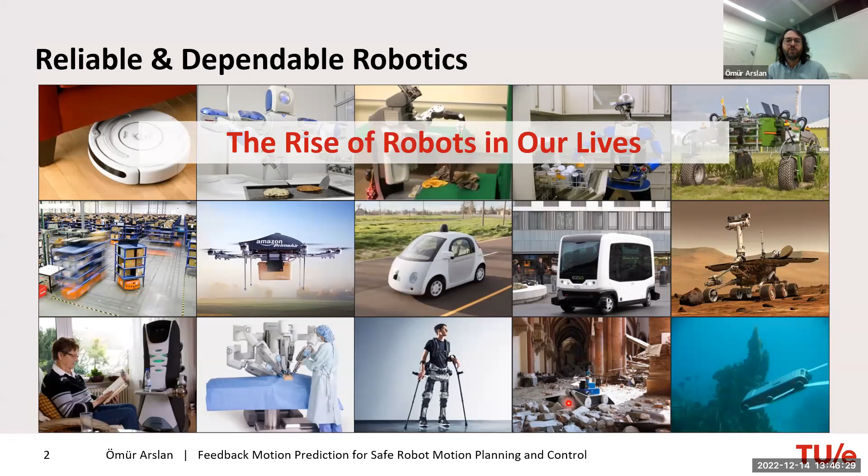Yes. So why robotics? I believe that everyone is aware of this popular news about robotics, how they are going to change our lives from mobility, with self-driving cars, to autonomous deliveries, maybe in the warehouse. Also, of course, the most important thing is they will play a key role for people in the long run, for elderly care, minimizing some kind of dangerous tasks for people. And all of this is, of course, because of one thing: these platforms provide autonomous motion. So these platforms ideally need to understand what they are seeing, and they can come up with some plan and execute it and perform a diverse set of tasks.

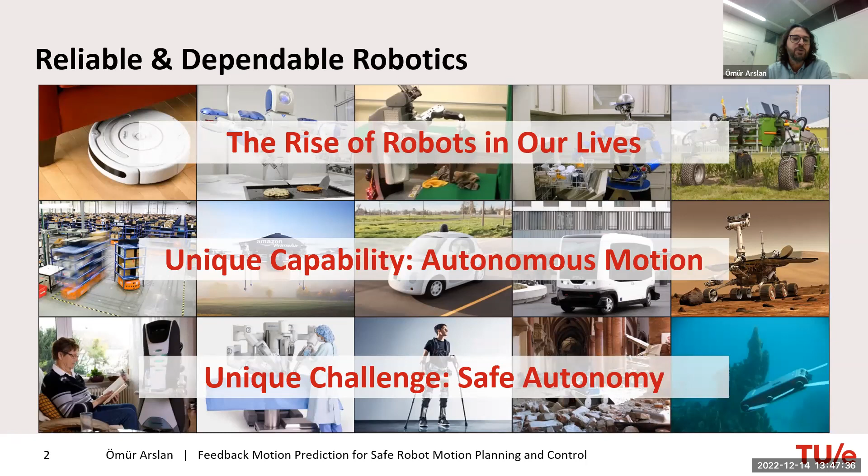And that is the main research focus I have currently. I work on the algorithmic side. I am not interested in designing new hardware because there are many people doing this kind of work, and it's a relatively very established field of research, also technology domain. But when we look from the algorithmic perspective, how to make these machines smart, it is still a challenge.

I usually look at fundamental and applied research for safe robot autonomy and active perception, which means making a link between the decisions you make for your control and also for perception. There's a nice interplay when we think about mobile robotics between perception and action. In order to take some action decision, you need to use perception. And in order to get good perception about the environment, understand how it's structured, even build a map, you need action. So this interplay, I believe, is a nice domain for research.

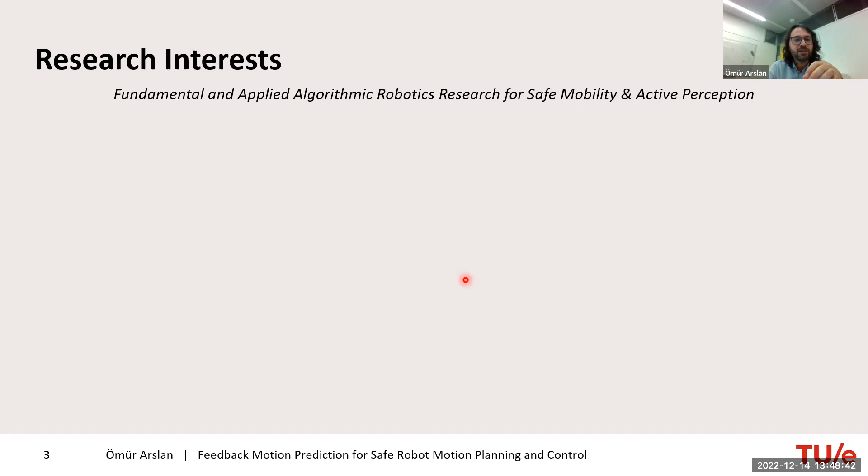And I particularly focus on motion prediction for motion planning, because when it comes to safety, you cannot just say that I don't have a collision right at that moment, and it will ensure that your motion is safe. Because when you think about driving, if you are driving at a certain speed and you want to stop, it doesn't happen immediately.

And it plays a key role about ego motion estimation of your vehicle, and also the motion estimation of the other people, maybe other autonomous agents in the environment. Of course, perception plays a key role.

So when you think about a mobile platform, you cannot really solve perception separately, motion planning separately, control separately, and put them together and expect that it will work. Unfortunately, it doesn't work in practice. We know it very well. So how we can design motion planning algorithms that will be also aware of the limitations of perception - this is, I believe, another promising research direction. I put some effort on that direction as well.

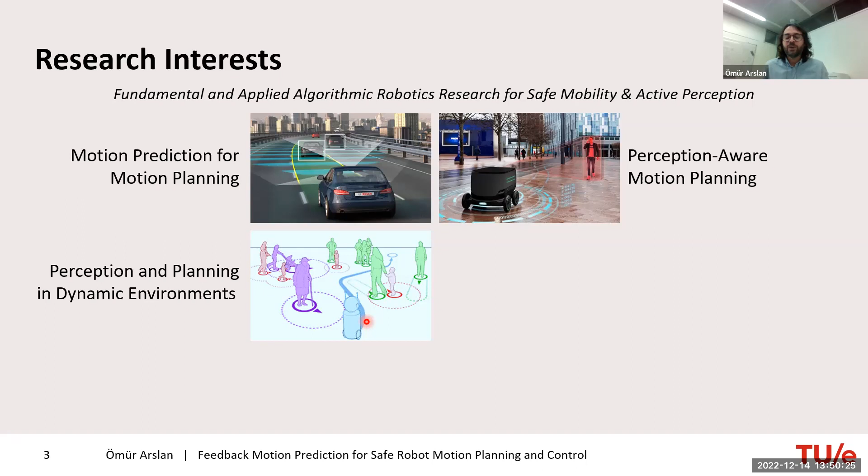And then the other challenge is the dynamic environment. So we have pretty mature understanding of how to do motion planning and perception about static environments. But when you go to a dynamic environment, all of a sudden perception and planning becomes a challenge. And these are actually all linked from my perspective. In order to solve all of them, you need to approach perception, prediction, planning and control in a holistic way. If you want to find a robust solution, you need to integrate them.

In parallel to these three aspects, I also work on active perception in mobile sensor network settings, like you can think about a distributed camera network. They need to get some surveillance information about the environment, and how we can do this effectively - because usually sharing the raw sensory information between these agents, it's not possible because of communication and power limits. So how we can come up with a smart way of doing it in a systematic way so that they will obtain some global understanding of the environment just using their local observations and the interaction between them.

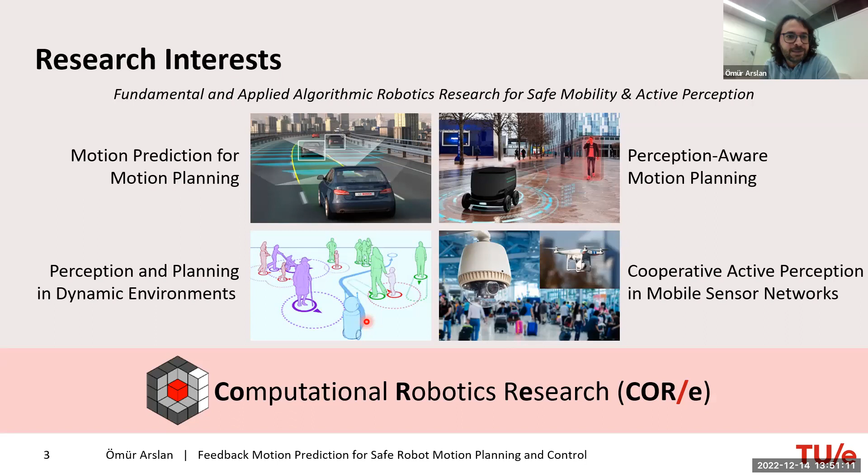Overall, I say that I work on computational robotics research, and that is the name of my lab here - it's the CORe lab. So I have been at Eindhoven University for the last 3 years.

So it takes lots of effort to bring these things into a really physical setting, and we are still setting up our lab infrastructure. Currently, we have some mobile platforms like scaled cars, some simple education platforms like TurtleBots, and we have a motion capture system to always get some ground truth, to justify that our algorithms do the correct things. We have multiple cameras that also provide some side information, because robotics - the autonomy for a robot doesn't need to be like a human, in the sense that it should be only self-sufficient. The interaction with the environment is very essential, and it's the flexibility, because you can then do much more effective solutions with limited computation and perception skills if there is some side information coming from the environment.

Because of that, I also look at the interaction between the robot and the environment. And we have some new members joining our lab in the new year, a mobile platform with a robotic arm, so that we can really go from mobile navigation to a little bit of mobile manipulation-like tasks.

And at the end, hardware doesn't do its job by itself, so we need people. So I work actively with students at the master level, at the PhD level, and sometimes with bachelor students as well.

So going back to today's topic, I will basically talk about motion prediction for safe robot motion planning and control. And I assume that people have maybe different understanding of what robot motion planning and control means, so let me start with that problem first.

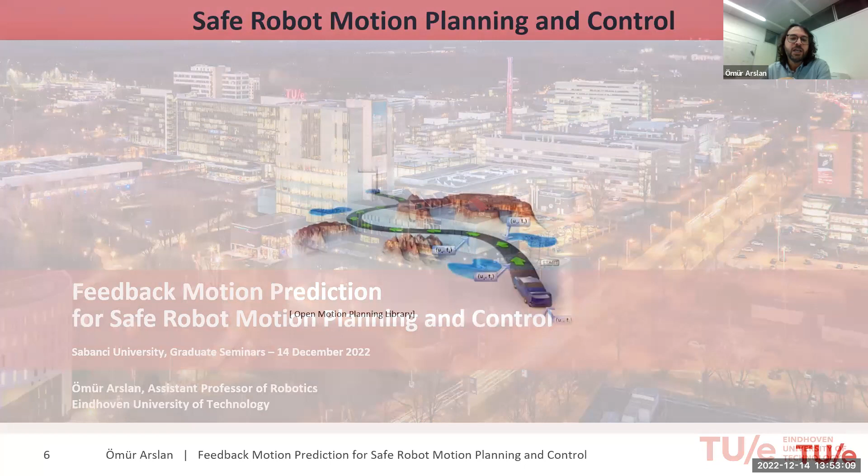So robot motion planning and control is basically nothing but - you have a platform like an autonomous driving car or a mobile service robot, and you want to go, let's say, a simple task from a given position to a destination. You have some parts of the environment you can use to traverse, so you can move, and some parts you are not allowed to move because they are obstacles or there can be other constraints. And in a very abstract setting, it can be thought of as finding the control inputs U at every time instance, such that when you apply this control on your robot, it will take you to the destination.

Of course, there are a couple of challenges here. Directly finding the control to solve your problem can be computationally hard, sometimes technically not possible. And the other challenge is when you have these controls decided ahead of executing them, with specific timing - if something goes wrong on the way, you need to do replanning, and this is a kind of a challenge. We see that in practice, this kind of approach doesn't work.

And how we solve it - when we look at the standard approach, they solve this problem in 2 steps. First, let's forget about the actual robot dynamics, maybe consider a very simple system.

It can be controlled in terms of its position, and it can go in any direction you want. You want to plan a motion, potentially a path, by taking into account the environment geometry, so you avoid the obstacles and find a path from the initial position to the goal. You need to execute this on the real platform, and you can do that by applying low-level control which takes care of the robot dynamics towards a specific location.

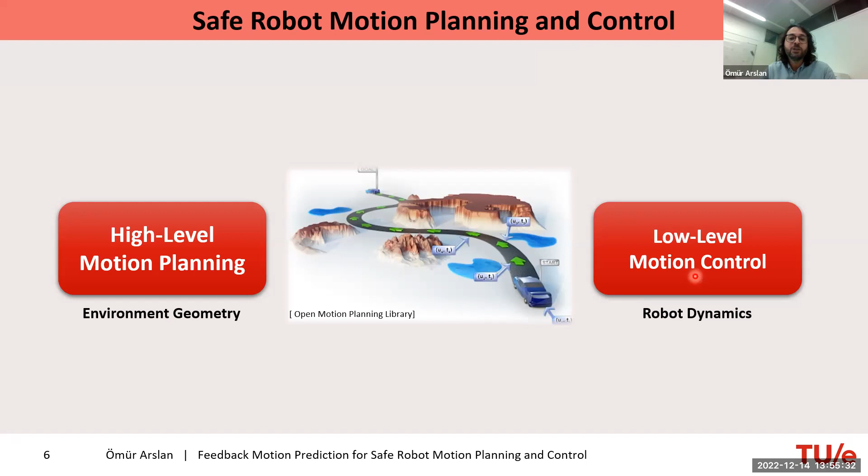When we are doing this motion control, most of the time we forget about constraints like safety. Safety is mainly handled with the high-level planner, and stability of motion is handled with the low-level control, but the gap between them can cause issues. Can you make sure you execute the high-level plan in a safe way? So there is this gap, and closing this gap requires lots of research.

We have early attempts. When we look at earlier work on applying high-level plans with low-level motion control, you can use a functional representation like a potential field. The idea is: can I convert the geometric information about the environment into a function such that it has a global unique minimum at the destination location, and takes maximum, often infinite, values on the boundary of obstacles? You follow the gradient field to reach the destination without even planning a path, since it specifies the control input at any given location, and it can be easily adapted to robot dynamics. So we like gradient fields.

The challenge here is finding a functional representation of the environment. It's hard—it works in very simple settings, but when you think about very complex environments, unfortunately it doesn't work. How can you overcome this problem?

I suggest that instead of linking environment geometry to robot dynamics, let's find a geometric representation of the robot motion. Don't worry about the dynamics much, but find a representation that tells what the robot motion will look like in terms of a geometric description. Today I'll show one method, and this geometric representation can be used to safely execute the motion. There's plenty of work in this domain on linking high-level and low-level planning—I'm not giving a survey or lecture, but sharing my perspective: I think the right way of doing the link is through geometry.

So we need to turn robot dynamics, robot motion, into a geometric form. What does that mean? When I think about robot control, I usually think of a robotic system: you have a control design, well established, to execute a reference task—it can be like reaching a point. So when you apply this to your robot, starting from a given configuration, you can reach the destination, and this is the motion.

What we mainly worry about is the safety of this motion, because you can have obstacles around. One way to check safety is, if you have a very precise model of your robot and controller, you can simulate the motion and get the trajectory. To verify safety you need to check at every time instance, so there isn't a systematic way to verify the entire motion will be safe unless you do something else.

Motion prediction becomes a way to do this. The idea is: can I find a simple geometric shape that describes my motion instead of the full motion trajectory? Can I get some idea of what my motion range will be while reaching the destination under that specific control, so I can use this motion range? If it's simple and accurate, I can use it for safety assessment.

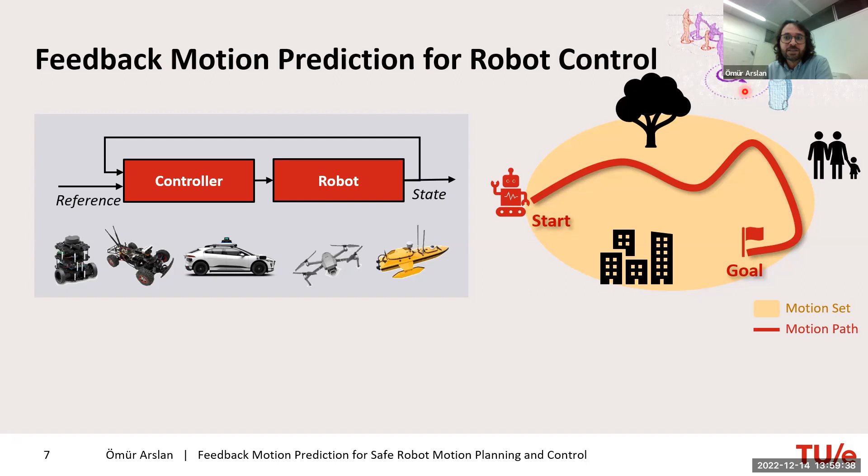Then think about a dynamic environment with many moving agents. If you have some idea how they are moving, under what control, with what reference, you can come up with prediction ideas, and plan your robot's motion based not only on position but intended future motion, which usually works more effectively in practice—and how to verify that it will really be correct algorithmically.

So overall, if I want to summarize, the objective is how we can relate the geometry of the robot motion to the environment in order to ensure the safety of robot motion.

Of course, there may be many different ways to solve this problem. One potential option is to find a motion set that will be specific to the controller you use. Starting from any initial condition, it will contain the motion you have. And here the challenge is, what should be that motion set?

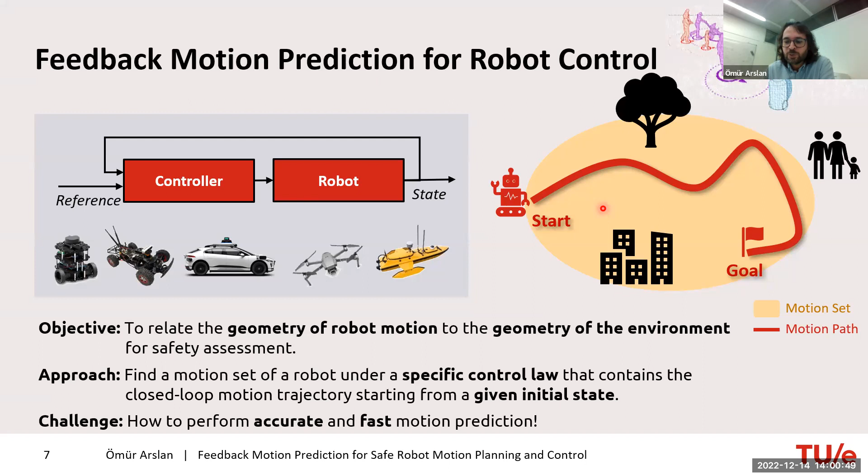It should be simple, because we want to use it for collision checking. And it should also be accurate, because if it's too conservative, like a potential motion prediction covering the entire space, it's not informative. It should accurately describe the motion itself. This is a general research direction, and I will show you a couple of examples in the following slide.

I'm usually interested in more complex dynamics, like nth order systems, where you use not only position and velocity but maybe acceleration and higher order derivatives. This is one way of making a link to non-holonomic systems. We'll see an example, like a differential drive robot, which cannot go sideways. So when controlling it, you cannot consider it fully actuated, but by increasing the order of the dynamics, it can be modeled like a fully actuated system, at the cost of higher order equations of motion.

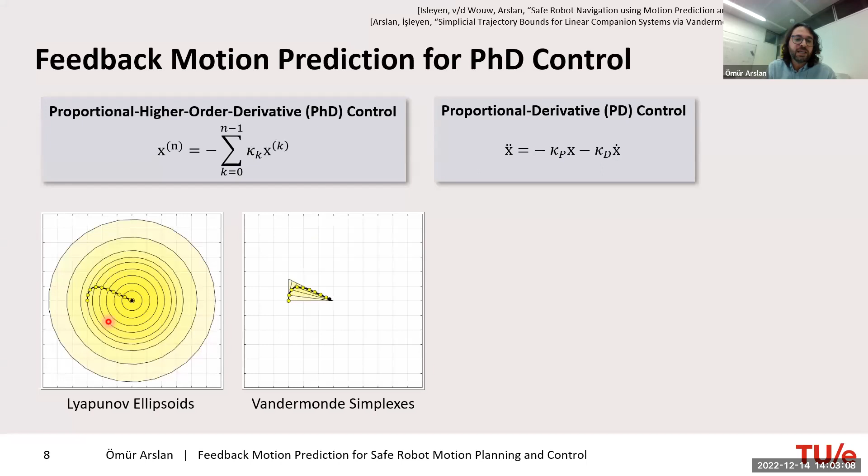Recently, we developed new tools called Vandermonde simplices. These are more tailored towards the control you have, and the initial condition you have as a starting point for your system, and they can capture the same motion much more accurately. We will see why this is critical when it comes to motion planning.

But before that, let me show a disadvantage of the Lyapunov ellipsoid. Here you see a second order system starting from arbitrary positions with different velocities. All of them share the same energy level mechanically, and the corresponding Lyapunov motion prediction is the same for all of them. So it cannot really precisely describe what your motion is, but for a set of initial conditions, it tells the expected motion.

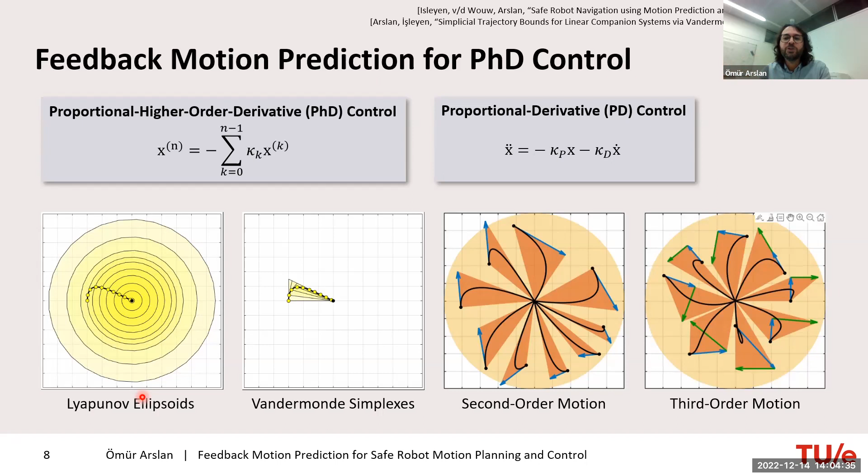This is related to the invariance property we like about these tools in stability. But when it comes to expressing the motion of a robot, I believe we need to give up this positive invariance property - I just need to be able to express the motion for the state I currently have for my robotic system. These constructions can also be extended to higher order systems, and the nice thing is they are also analytical representations, almost like the Lyapunov ellipsoid, which makes them a very attractive tool to describe robot motion and relate robot dynamics to environment geometry.

To show that, I will talk about the path following task. Here you are in an environment with an obstacle, and you want to safely follow this path. How can you do this? There are many ways, and I will tell you one nice new option: creating a feedback time parameterization of a path on the fly, based on the expected motion of the robot and the environment.

So how does it work? You have an environment, you use a reference planner like a search method such as A star, or a sampling-based method like RRTs (rapidly exploring random trees), or a user specified reference path - it's also possible through human robot interaction - and you want to follow this path with a robot. You also can come up with a standard way of controlling your robot. If you forget about the obstacle, you know how to stabilize it around a particular point, and with motion prediction, we can also describe the geometry of that expected motion.

The key idea is you have the robot position and a particular path point you want to reach. You can estimate the predicted motion of the robot while reaching that destination. If that predicted motion is safe, rather than just a Boolean yes or no decision, you can measure it as a continuous value, like distance to collision, with our safety assessment. You can also describe how to change this path parameter, because ultimately you want to reach the end of the path.

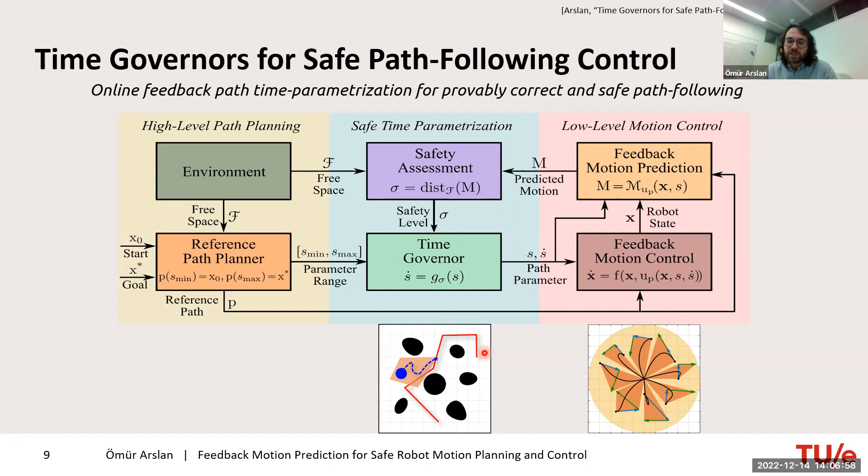When we look at the motion of a second order system using this philosophy with PD control, we take the PD control and the corresponding motion prediction, and applied different ways of doing motion prediction, because we also wanted to know the role of motion prediction in robot motion. We have two options: the Lyapunov ellipsoid and the Vandermonde simplices.

Also, when it comes to feedback control, you can provide just the reference position where you want to go. The other option is, since we are tracking how the path point evolves, you can also provide the reference velocity as extra information, and we can check the resulting motion.

Here on the left, you see the path following behavior with motion prediction. The yellow region is the predicted motion when reaching that red point. It evolves along the path and always stays safe in the sense that it doesn't intersect with the obstacle, and this gap ensures that we can safely move along the path.

When there is an open region, it allows the robot to speed up, and when it gets close to the obstacle, it slows down. One thing to observe is that when moving in the corridor, since the motion prediction is symmetric, it doesn't only worry about collisions ahead of you, but also sideways collisions, which are less relevant to your motion. I believe that's one limitation of the Lyapunov ellipsoid, or any conservative motion prediction.

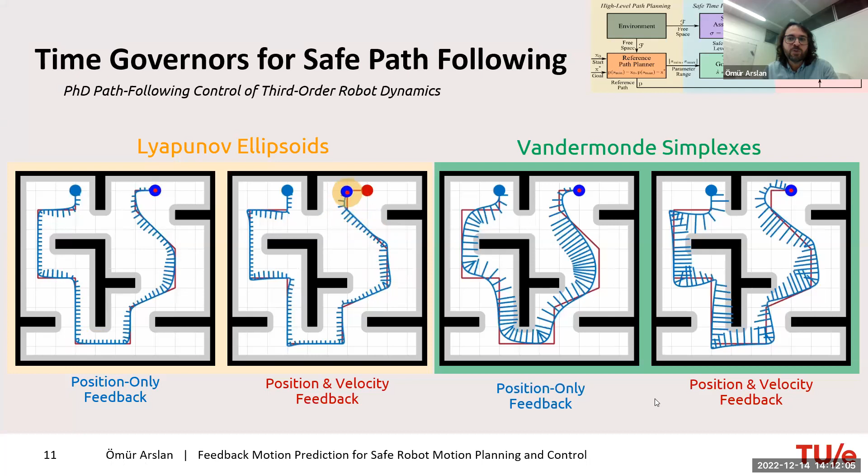Of course, this was the initial development. We want to move more towards actual robots, which may not have fully actuated robot dynamics. We recently looked at how we can also do motion prediction for more standard robot platforms like unicycles—mainly differential drive platforms used a lot in warehouses, maybe a Roomba robot that cleans your house. Basically you have the position and orientation of a system, and you can control the forward velocity and rotation angle, but you cannot go sideways.

That is the limit. We just pick one control policy from the literature, which is very established and used a lot in practice, because we don't want to reinvent the wheel—but how we can do the motion prediction. In brief, the idea is if you want to reach a destination point, you need to turn towards that destination and move towards it when it's possible. So you inherently decrease your Euclidean distance to the goal.

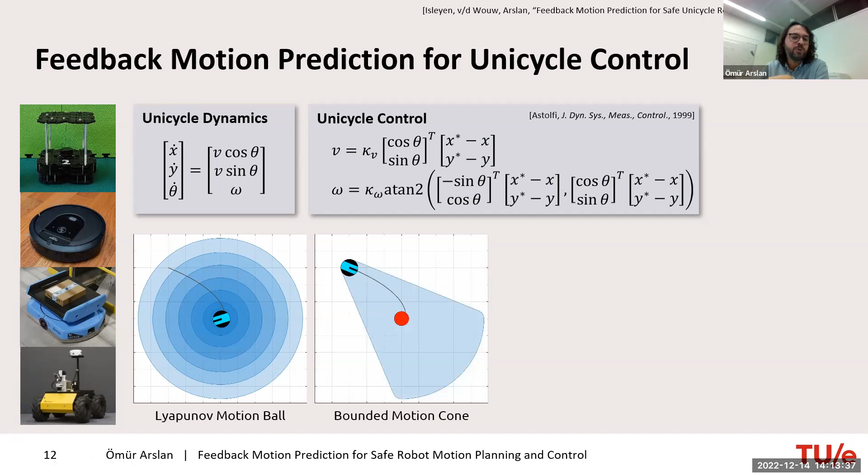This comes with this Lyapunov-like motion prediction. So while reaching the destination with a unicycle, you can perform Lyapunov-like motion prediction using these circular regions. But we see that we can do much better because we also have nice orientation control. We always want to keep looking towards the target location, and we combine these two ideas—just take a cone towards the goal and take the intersection of this cone with the Lyapunov set, and you get a better construction.

Actually, you can do something much better because this cone already allows you to apply the Lyapunov motion prediction a little bit into the future, and you get a much more accurate prediction of your motion that can be more relevant when you're moving around an obstacle. You can use the structure of the control to make it even more accurate. But sometimes you need to give up other nice properties like convexity, and it brings another question: up to which level should I be increasing this accuracy?

Is there a limit? Because the best you can do is the actual trajectory, but we already know that it is not the right way of checking for safety. So there will always be a trade-off in the accuracy of this motion prediction. It will help with motion design up to a certain level, but beyond that, it wouldn't pay off to make this motion prediction more accurate.

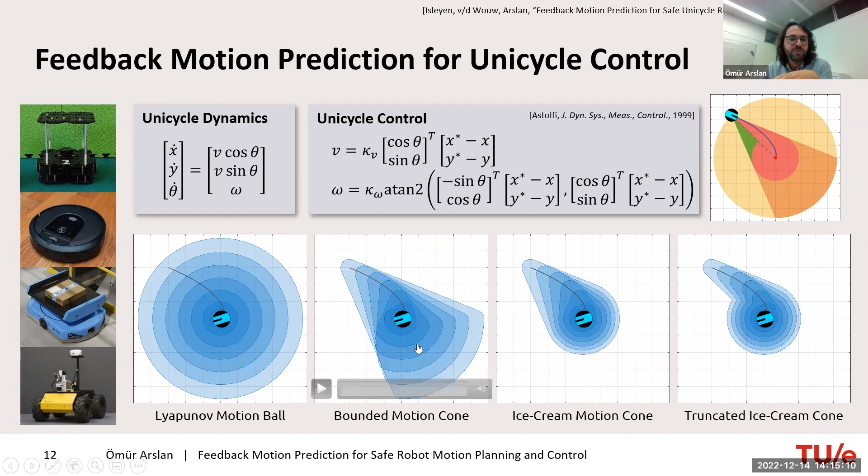We checked and applied these ideas instead of the time governors—now we use the reference governor. The idea of the reference governor is that you are not changing the temporal specification of the plan, but maybe sometimes the geometric specification. So you have a freedom to change the direction of motion if you want.

The starting point, again, is a high-level plan. We have a vector field plan around the reference path, designed for a fully actuated system—a kinematic system that can go sideways as well. We want to execute it on a unicycle, which cannot go sideways.

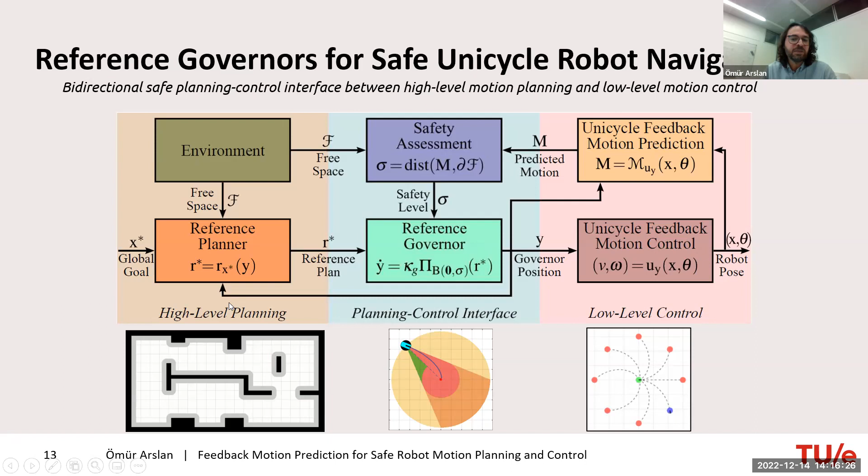This interface between the high-level planning and low-level control, we established through the reference governor and this safety assessment based on motion prediction. From our perspective, this is a kind of nice bidirectional planning-control interface such that it can guarantee that whatever you plan can be realized with the low-level control in a safe way. So the safety of the high-level plan can be transferred to the low-level plan if you use motion prediction.

Again, we did some initial simulation studies to see the role of motion prediction. Accurate motion prediction yields faster motion, but if you do more than enough, it doesn't pay off much—it only increases the computational cost of doing this safety assessment, but at the end, the motion doesn't change significantly.

So the current work is going more in the direction of how we can apply these ideas in real physical systems. We are trying to make it work with sensors. The perception part is one thing I think is very important—not only interfacing planning and control, but interfacing planning and control with perception, because robotics is done with perception. Otherwise, it will only be a kind of case study—you can do lots of math, but with no impact on practice.

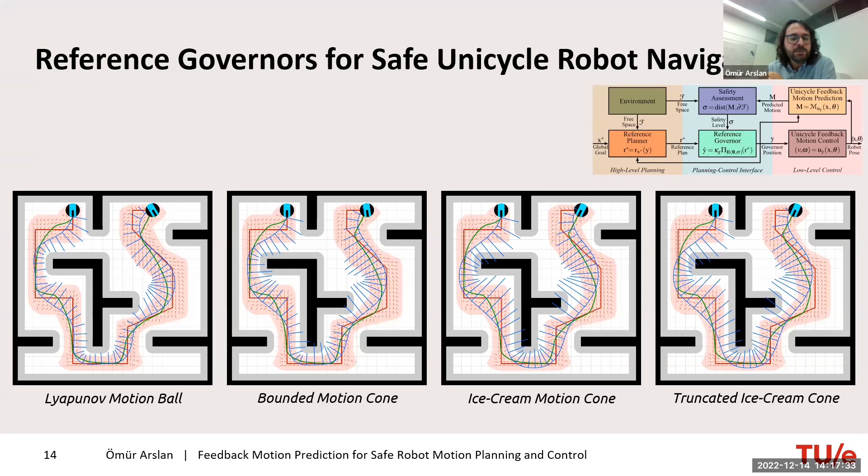Now I believe I will slowly wrap up, and it will give us some time for discussion. Some concluding remarks: I think motion prediction, from my perspective as a person working on robot motion planning, is a way to relate the geometry of the robot motion to the geometry of the environment.

Motion prediction, especially feedback motion prediction that keeps in mind the control you are applying, is a very promising direction, and I will continue pushing in that direction. I encourage people to work on these kinds of things because there are many different robotic platforms that need these kinds of tools for reactive planning.

It offers a very informative safety certificate. Existing tools like instantaneous collisions or time to collision are a bit heuristic and made up. Motion prediction, if accurate and easy to compute, can be an effective way of justifying the autonomous motion you are designing, and it currently enables us to do integrated robot motion planning and control.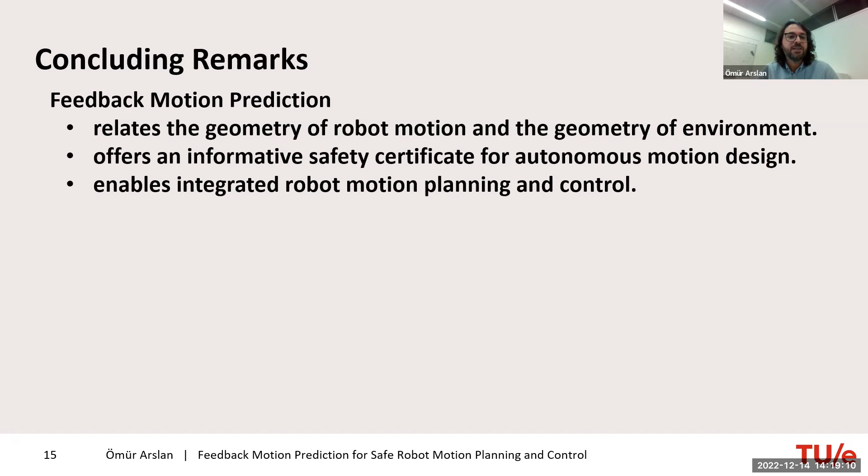Classically, planning and control are decoupled, and when you try to run them together there are essential issues. Doing this in an integrated way ensures increased robustness, and there are potential open challenges here for future research direction.

As I told you, I will go on the perception side. I encourage many of you to also look from that perspective, how we can integrate perception, prediction, and planning all together with learning as well. Our systems always interact with the environment and gain new experience, so why not use that information back in the prediction? That is a very promising direction, and it can be related to machine learning a lot.

The other thing I believe is that planning in dynamic environments is challenging, in the sense of justifying that an algorithm you design will work in a dynamic environment, and how to approach that problem as a starting point. It's challenging, but overall dynamic environments bring up many perception, planning, and prediction challenges.

As for potentials, I believe many standard robot control methods have known stability properties, but they don't have this kind of prediction tool. We've started building some for mobile platforms like drones, but there can be many other settings, like manipulators, where we could do this kind of prediction. In addition to ego motion prediction, allocentric motion prediction is also important.

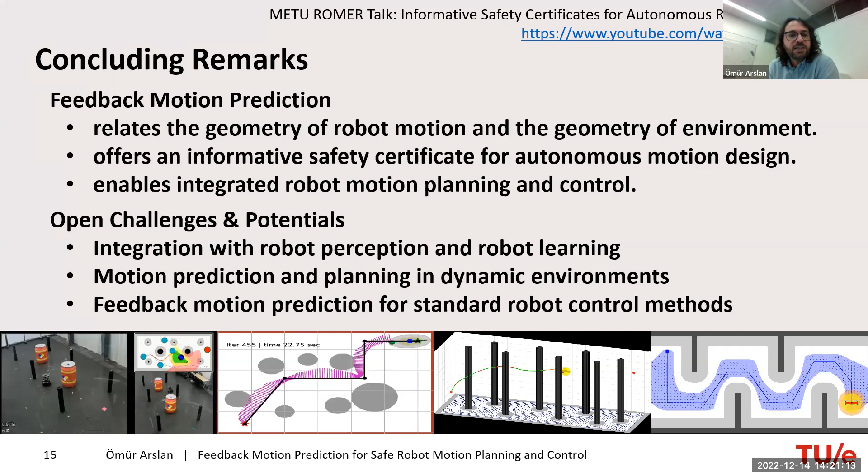Going back to my starting point, there is huge potential and lots of research challenge to link high-level planning to low-level motion control. When I look at the literature, there's a 30 year gap between navigation functions and our recent work. There are many promising tools, but we don't have the method to solve that problem yet. That is a bottleneck in front of many technologies, like why we don't have autonomous driving yet - we don't know the link between planning, control, and perception.

So please be open, and look at this problem a little bit at the conceptual level, and try to come up with your own philosophical approach and your own challenge.

And if you have any question, I will be happy to answer them now.

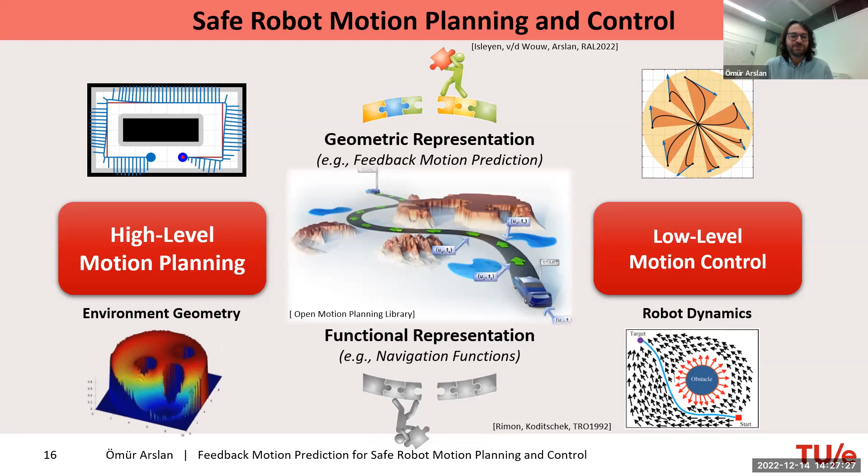Very interesting. So state of the art is not a ground truth for me, in summary. I try to go over the state of the art — what will be the tools of the future? Yeah, and that is, I believe, the driving force for our research.

So this is mainly a vision, more like a philosophical perspective than solving a practical challenge today. I understand. Okay, very interesting.

Yeah, any other questions from the audience? Don't be shy. Nothing at all? So there are 19 other people. Yeah, some left, I guess. So is anyone working on these kind of topics, robotics, mobile robotics, perception? No one. I know we have students doing that kind of work, but maybe they didn't join today. No one? Okay then, I'm also checking the chat, but yeah, okay.